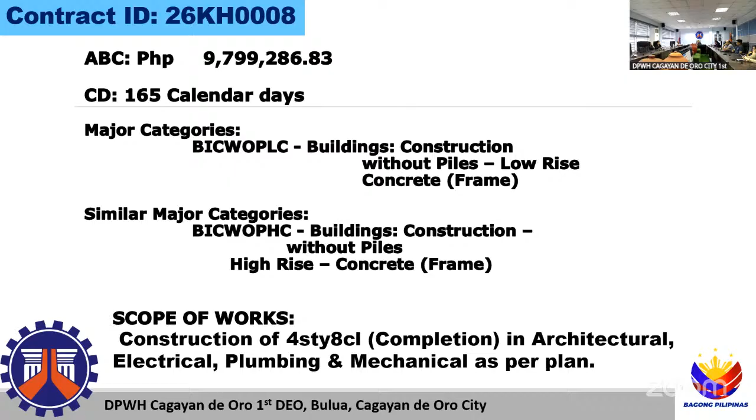So site location is this area. Site photo is one. And the perspective is one.

So the scope of works as per plan: no ceiling at fourth floor, no interior partition at the fourth floor, no doors, windows at the floor, no partition at the fourth floor, no plumbing fixtures at the fourth floor, no blackboard at the fourth floor, no interior painting at the fourth floor.

The rest will be constructed. So the architectural plan is one: ground floor, second floor, third floor, the fourth floor, and the roof deck. And this is the front elevation.

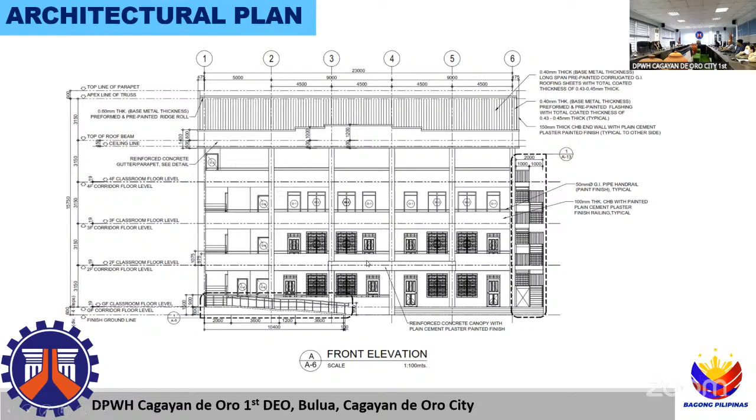So rear elevation, and right side elevation, left side, cross section,

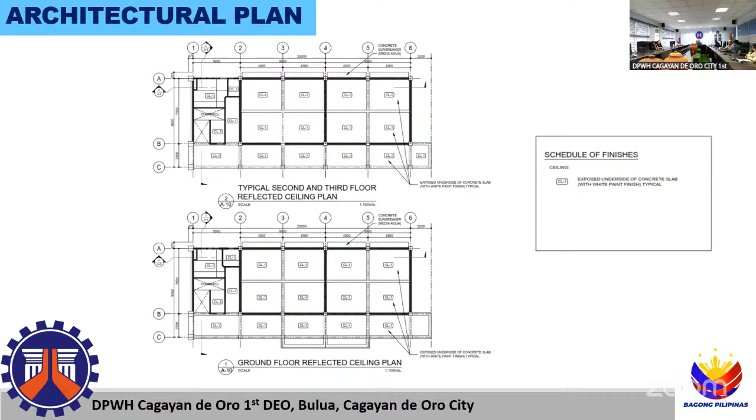schedule of architectural plan, schedule of windows, schedule of doors, and also reflected ceiling plan, so no ceiling on the floors. CL-1 exposed concrete slab with white paint finish to be had. So schedule of doors, windows, and also

the toilet details for PWD compliance as displayed. Strict compliance for the turnout to be smooth. So then the ramp details and the ramp railings and also the section of railings.

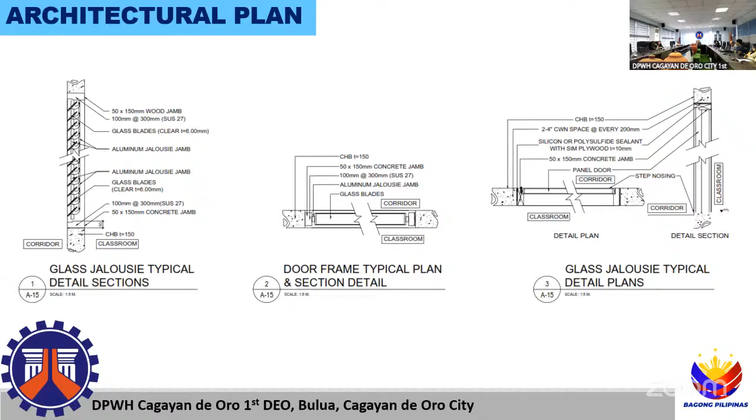Spot details of plan. And also we use glass jalousie typically for section. So ground floor and structural location of the masonry wall.

So we also have a fire exit, stairs still. Third floor, fourth floor. The roof framing plan is also included in the scope.

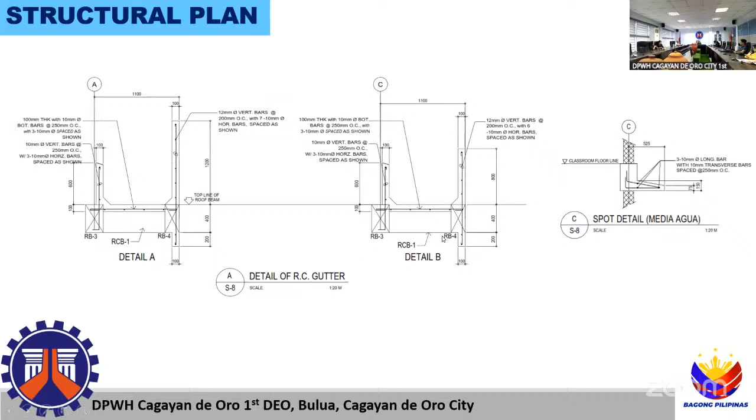And the internal concrete gutter. Connection details of truss to column, truss details, truss details. Then framing plan upstairs under deck.

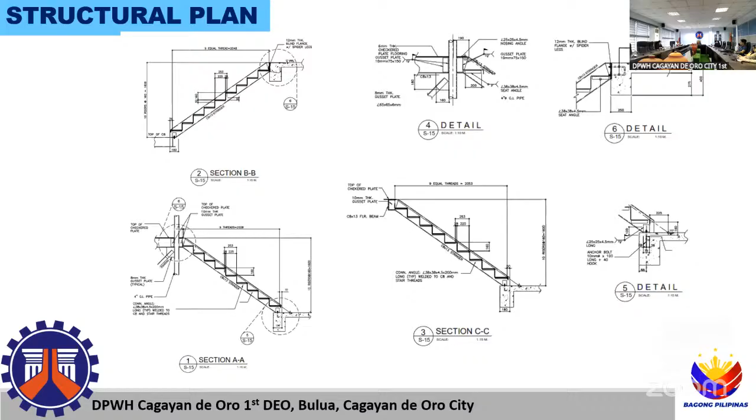And cistern tank detail, 3 meters by 2.8, and that is 2.2 meters or 2 meters.

Okay, let's go for the plan details. So we'll discuss the summary of quantities. Part B, other general requirements.

B.3-1, permits and clearances, 1 lump sum. B.5-1, project billboard / signboard, 2 each. B.7-1, occupational safety and health program, 1 lump sum. B.9-1, mobilization and demobilization, 1 lump sum.

Division I, General, Part C, earthworks. 803(1)a, structure excavation common soil, 80.832 cubic meters. 804(1)a, embankment from roadway structure common soil, 14.19 cubic meters. 804.7, gravel fill.

6.63 cubic meters. Part D, reinforced concrete: 900(1)c, structural concrete 3000 PSI class A, 28 days, 59.30 cubic meters. 900(2)c, structural concrete class B, 28 days, 2.16 cubic meters. 902(1)a1, reinforcing steel deformed grade 40, 7,799.82 kilograms, and 903(2), formworks and falseworks.

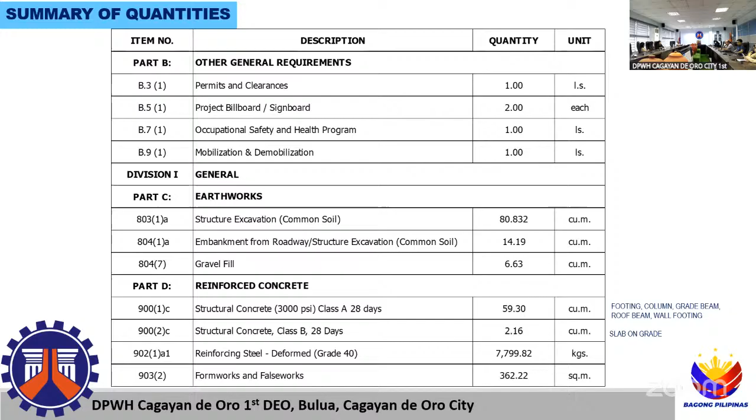117, carpentry and joinery works, 1 lump sum. 104, finish hardware, 1 lump sum. 1006, steel louver doors, 1.68 square meters. 1005, steel windows, 1 lump sum. 1091A, jalousie window glass, 71.76 square meters.

1012A, glass glazing, 15.12 square meters. 1010-2A, door flush, 18.21 square meters.

1010-2B, wooden doors, wood panel, 22.68 square meters.

1013-2A, fabricated metal roofing accessories, ridge or hip rolls, 29.28 linear meters. 1013-2B, fabricated metal roofing accessories, flashing.

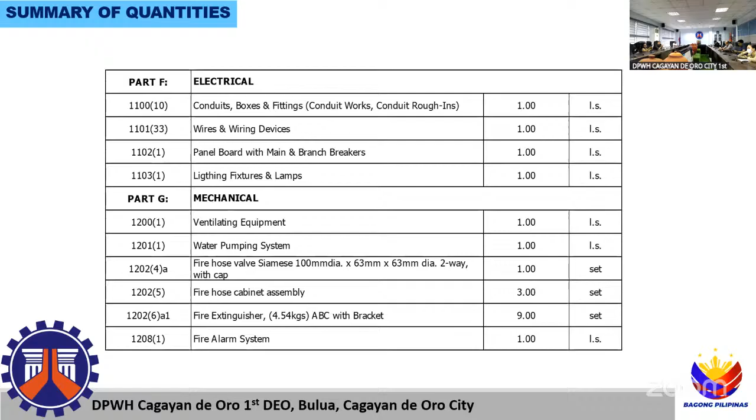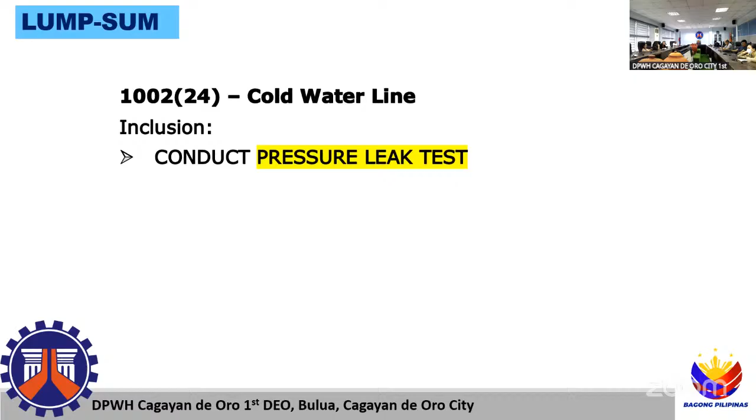Then carpentry and joinery works, inclusive of blackboard. And the lump sum of these pieces, and also wires and wiring devices.

And also the panel board details and lighting fixtures.

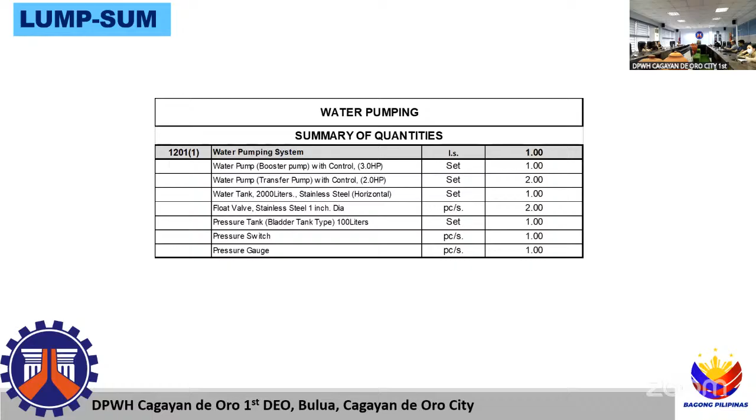And water pumping system, this one inclusive of the water pump, booster pump, transfer pump, and water tank, 2,000 liters, float valve, pressure tank, and pressure switch and such.

And description in ventilating equipment, exhaust fan, and also hose bib, fire hose valve, and also cabinet assembly, and also fire extinguisher and fire alarm system.

Grinder machine, 1 unit owned; bar cutter, 1 unit owned; bar bender, 1 unit owned; welding machine, 1 unit owned; truck mounted crane, all boom types and models, 1 unit leased; material testing apparatus, 1 set owned; hand tools, 1 set owned.

So that's all for the introduction of Iponan. Any questions?

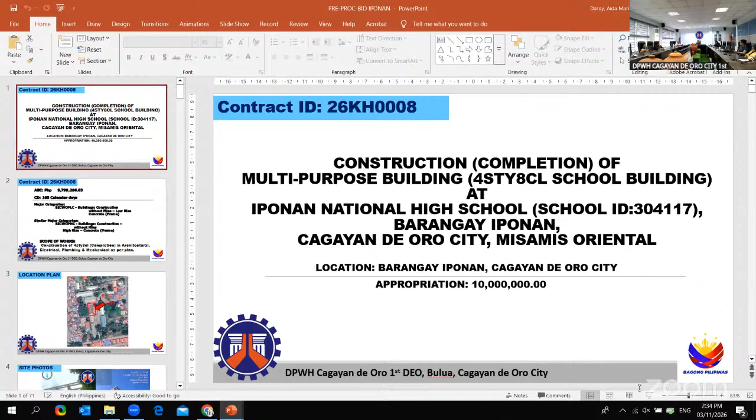So hearing none, let's proceed to our next project, 26K0026, Construction of Civil Service Commission Building, Barangay Carmen, Cagayan de Oro City, again to be presented to us by Engineer Christian Bulahan.

So the approved contract will be 4,889,645.47. Calendar days, 180 calendar days. And also major categories by CWO, PLC, and major categories by CWO, all PHC.

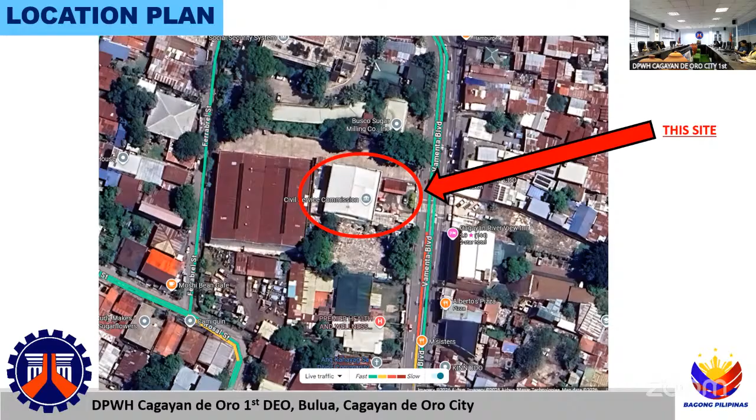So the scope of works is construction of Civil Service Commission Region 10 as per plan. Location at the side, inside the compound of the Civil Service. So the main interest here, but the access of construction will be here. So this one, because of the location of the site, will be at the back of the building. So this is the site area.

this one, a 2-story building with a storage room. So let's discuss what is inside.

So the ground floor plan will have the shredder machines. So we will prepare 1.5 meter door access for the shredder machines. So this is the position of the shredder, shredder machines.

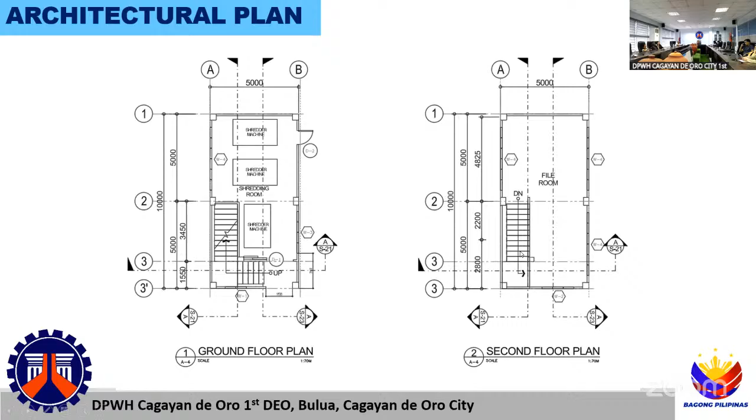Then the front elevation is what we have, CHB wall with aluminum cladding. Then

roofing, rib type. Then the elevations of the right side and the rear, and the cross section. By the way,

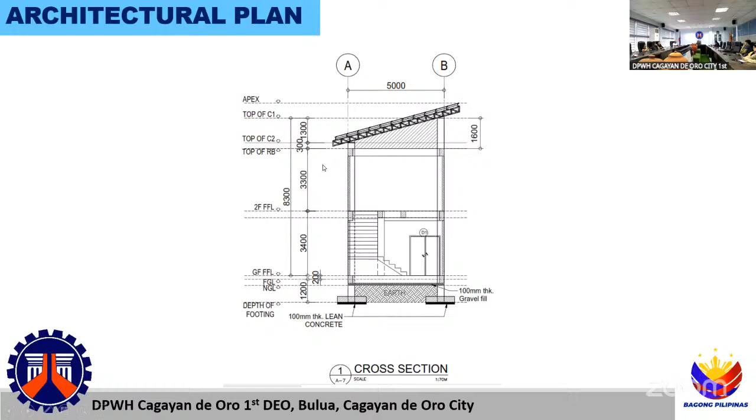this building has a high ceiling. We will prepare the height of the building from ground floor finish line to second floor finish line at 3.4 meters, and from the second floor finish line to the top of roof beam at 3.3 meters because they are used for stock room.

Also window two, sliding with sliding door as the glass windows, with all powder coated white aluminum frame. And also sliding glass windows also.

So we have sliding doors in the main entrance and swing type for ground and second floor. So roof plan.

Ground floor ceiling plan, we have acoustical ceiling board. The second floor, acoustical ceiling board. And the floor finish will be 40 by 40 centimeter glazed tiles.

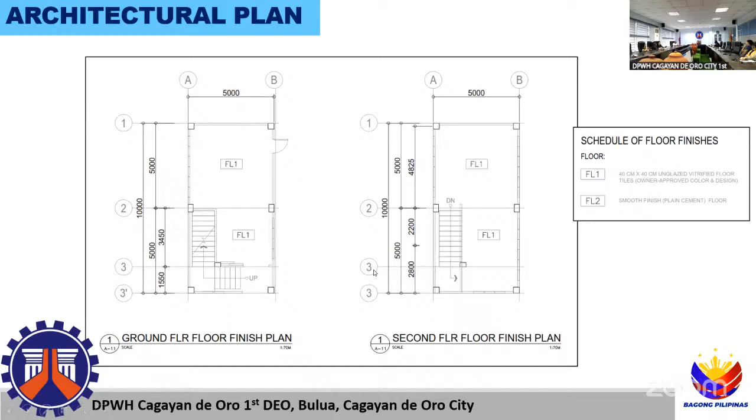Schedule of the plan and elevations of footings, details, and the wall detail of wall on footing typical to the building. Then detail of stiffener column.

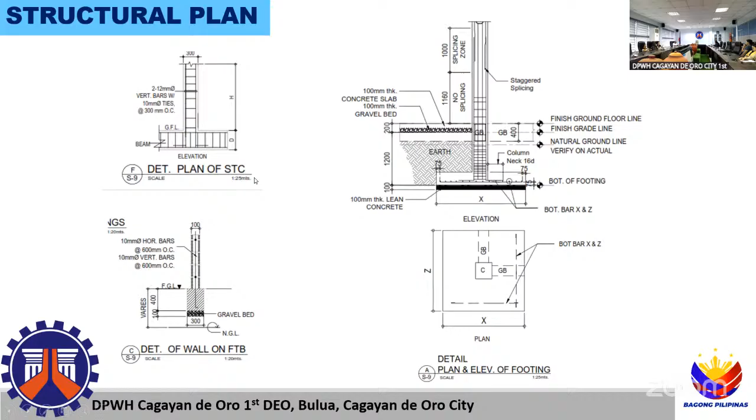Then footing, schedule of footing 1.6 by 1.6, F1, F2 is 2 meters by 2 meters, F3 is 1 meter.

And schedule of columns and elevations of columns. Typical details, so column details and elevations.

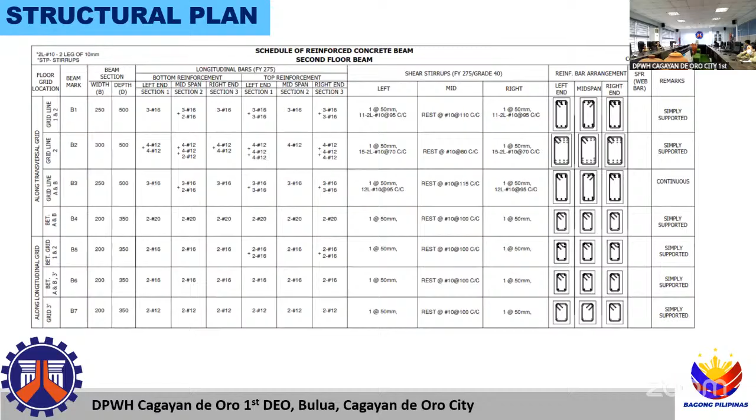Then the schedule of reinforced concrete beam or grade beam. And second floor beam schedule. And also roof beam.

And slab details, bottom bars and top bars. Schedule of slab and section of slab.

So longitudinal section 1 details, longitudinal section 2, and cross sections.

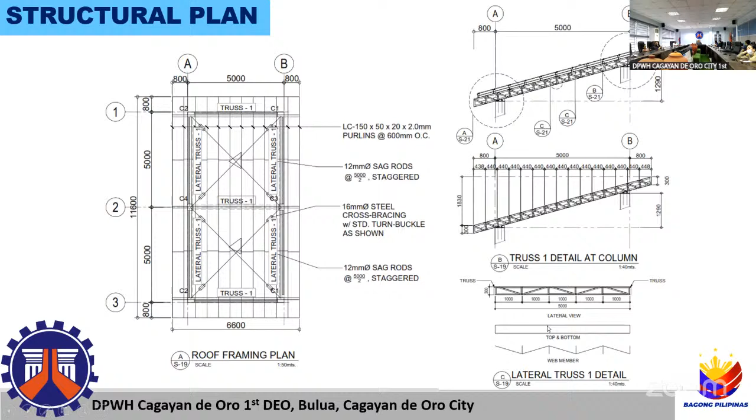So truss details is one. Then the truss detail, truss one details, we're using 50 by 50 millimeters double. Only the lateral truss one is single. This one, the isometric view, truss details.

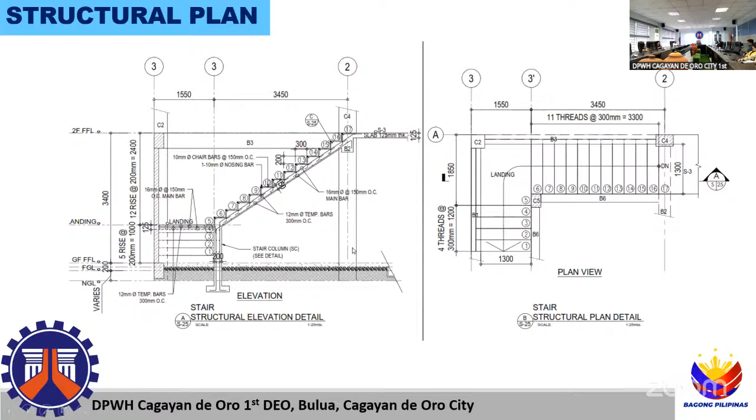So this is the typical details of the fence. So in summary of quantities: B.3.1 permits and clearances, 1 lump sum; B.5.1 billboards and signboard, 2 each; B.7 occupational safety and health, 1 lump sum; B.9.1 mobilization and demobilization, 1 lump sum; B.13 additional geotechnical investigation, 1 lump sum, because we will discuss this later in detail.

In part D, reinforced concrete: 900.1C structural concrete, 3000 PSI class A, 28 days, 26.19 cubic meters, including the footing, columns, grade beam, roof beam, and footing. 900.1I structural concrete class A, 28 days, 11.02 cubic meters - this is for the second floor or third floor roof beam and second/third floor slab. Also 900.2C structural concrete class B, 7 cubic meters, slab concrete.

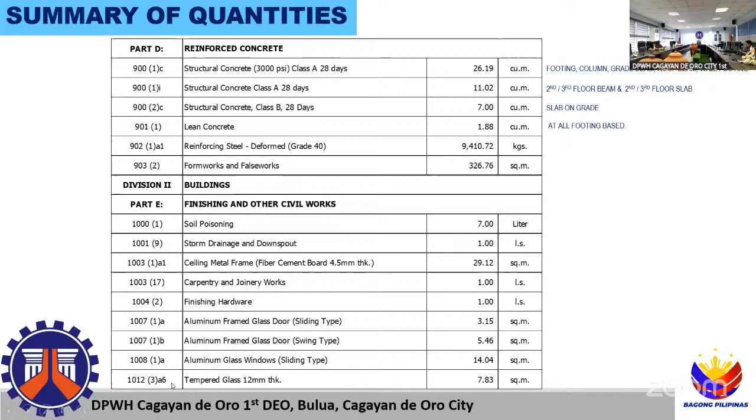1007.1A aluminum frame glass door, sliding type, 3.15 square meters; 1007.1B aluminum frame glass door, swing type, 5.46 square meters; 1008.1A aluminum glass window, sliding type, 14.04 square meters; 1012.3A6 tempered glass, 12mm thick, 7.83 square meters.

1027.1 cement plaster finish, 443.56 square meters. 1031.31 acoustical ceiling panel, 96.04 square meters.

1032.1A painting works, masonry/concrete, 337 square meters; 1032.1B painting works, wood, 29.26 square meters; 1032.1C painting works, steel, 8.32 square meters; 1038.1 painting insulation, 76.56 square meters; 1046.2A CHB non-load bearing, including the first and second floor, 232.28 square meters.

1047.4A bolts and rods, 24 each; 1047.4B turnbuckle, 16 each; 1047.5B sag rod, 12.46 kilograms; 1047.5C cross bracing, 82.06 kilograms; 1047.5D steel plates, 101.48 kilograms.

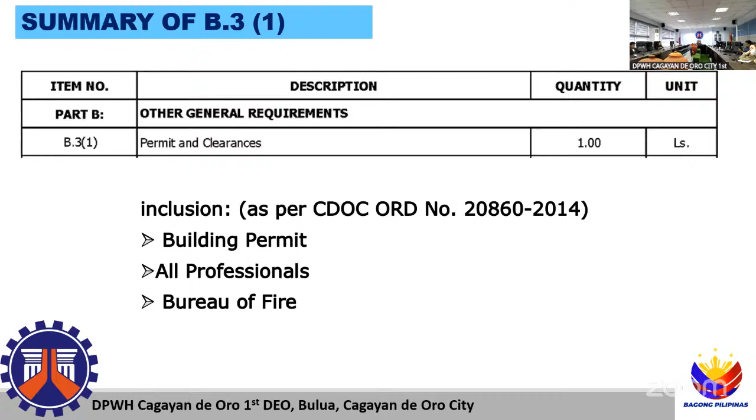So we discussed the summary quantities of the following: building permits and clearances, building permits, all professional fees, and B.7.1 the safety tarpaulin.

So in BDAT 19, additional geotechnical investigation. The inclusions are soil and laboratory testing, specific gravity balance, liquid limit device, glass plates, and drilling machine with complete series. Then geotechnical and geologist evaluation and report, 5 copies each set. Note that 2 sets of final geotechnical and geologist reports must be submitted at the office.

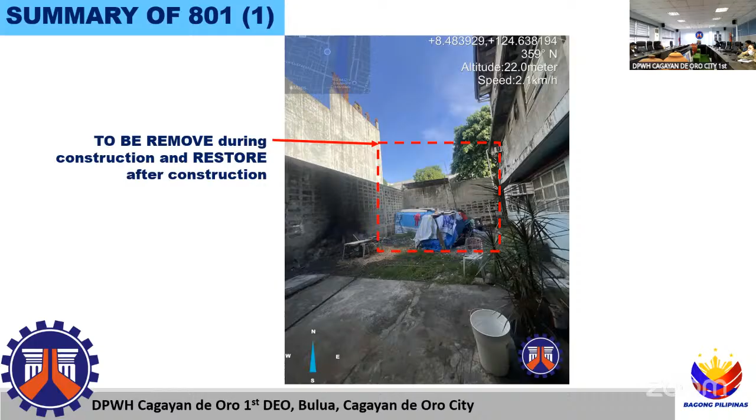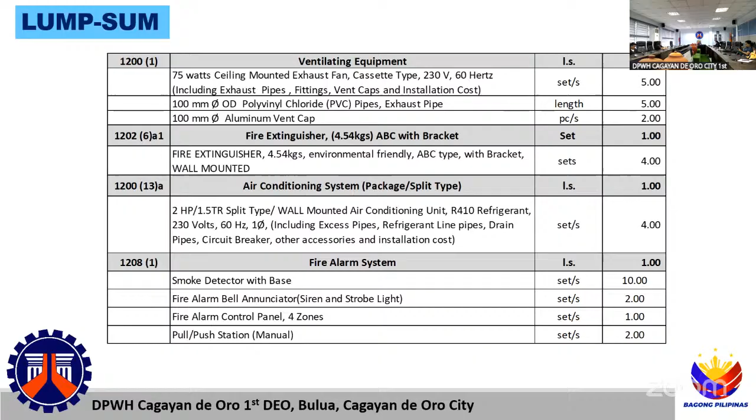So in lump sum items: conduit boxes and fittings, wires and wiring devices, the panel board, and also the lighting fixtures, ventilating equipment, fire extinguisher, aircon, and fire alarm system, and also the CCTV system.

So that's all for the civil service building.

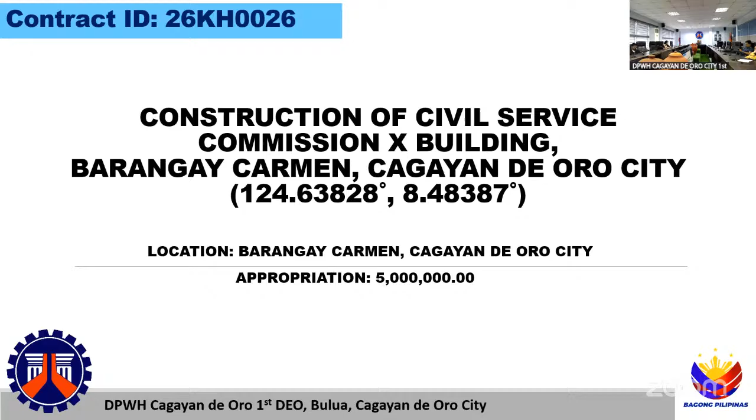26KH0027, construction of multipurpose building, 3-story 12 classroom building at Macanhan Elementary School, Barangay Carmen, Cagayan de Oro City. This is to be discussed to us by Engineer Misamis.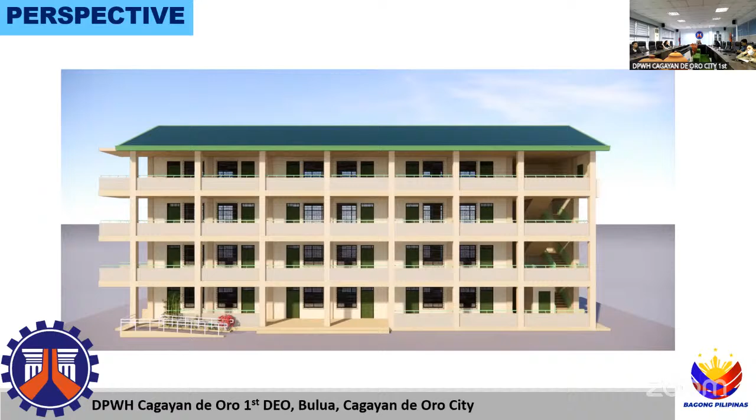This is the site development plan. So again, this project is located inside the Macanhan Elementary School.

So these are the architectural plans. For the ground floor plan, there is one room which serves as the feeding room, and classrooms 2 and 3 will be combined as one to serve as the library room for the ground floor.

Second floor, one regular room and classrooms 5 and 6 to be combined to serve as the ICT room. Third floor, one regular room and classrooms 8 and 9 to be combined to serve as the science room. Fourth floor consists of 3 regular rooms, namely classrooms 10, 11, and 12.

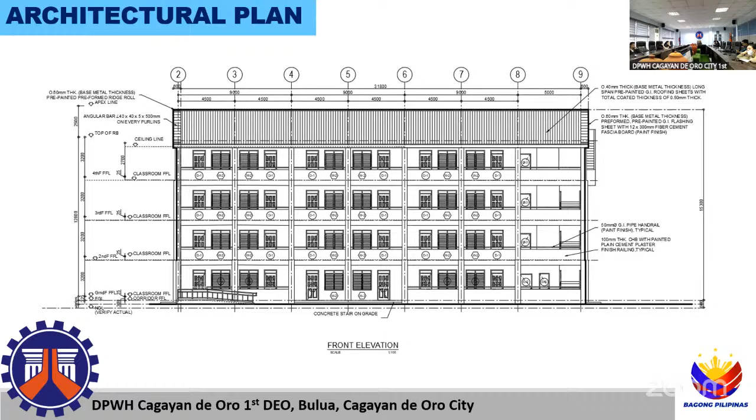So these are the elevations of the project, showing different elevations: rear elevation, left side and right side elevation. This is the longitudinal section of the project, cross-sectional section.

These are the reflected ceiling plans of the project, showing the ground floor, second and third floor reflected ceiling plan, fourth floor reflected ceiling plan, and the roof plan of the project.

So this is the schedule of doors, schedule of windows.

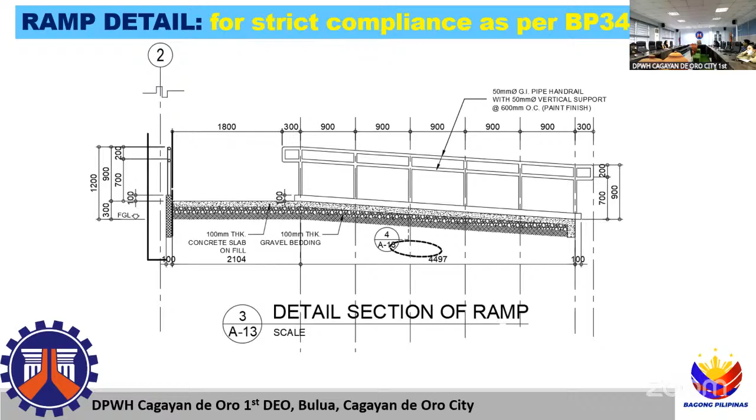This is the detail section of the ramp, which is for strict compliance as per BP 344. Detailed elevation of ramp, detailed plan again for strict compliance as per BP 344.

This is the detail section of handrails. This is the ramp detail, again for strict compliance as per BP 344. This is the detail for the PWD toilet detail, including the toilet details at PWD.

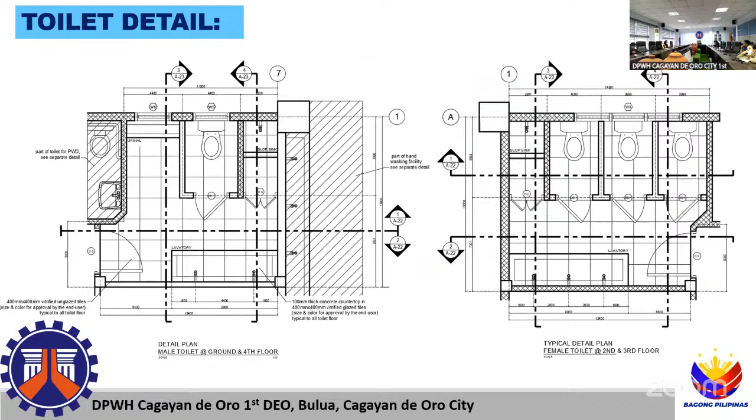Male and female toilet typical detail plan. Male and female ground and fourth floor typical detail. Male and female ground and fourth floor section detail.

For the structural plan, this shows the foundation plan of the project. Ground floor framing plan, typical second and third floor framing plan, fourth floor framing plan, and the roof framing plan at bottom chord.

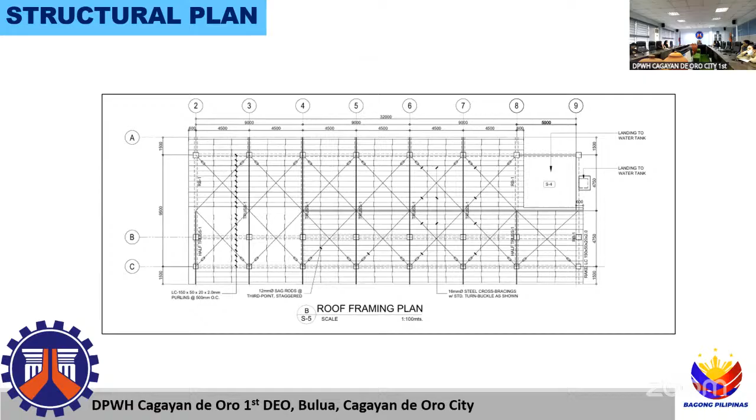Roof framing plan. These are the detailed plan and elevation of the foundation. This is the schedule of footing of tie beam.

Schedule of column, schedule of beams, and this is the schedule of secondary beams.

This is the truss elevation for truss one elevation, elevation of end wall frame and half truss. This is the schedule of trusses, members, and welds, including the concrete sun breaker detail.

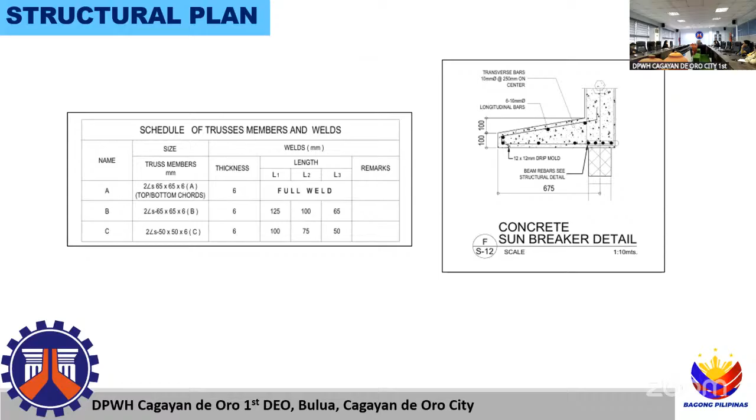Structural plan, blow up details of stairs. This is the plumbing plan of the project.

Septic tank, cistern detail, longitudinal section of cistern. This is the ground floor plan of soil and wastewater line layout for the ground floor plan.

The typical second and third floor soil and wastewater line layout. Fourth floor plan, soil and wastewater line layout. And the roof drain layout.

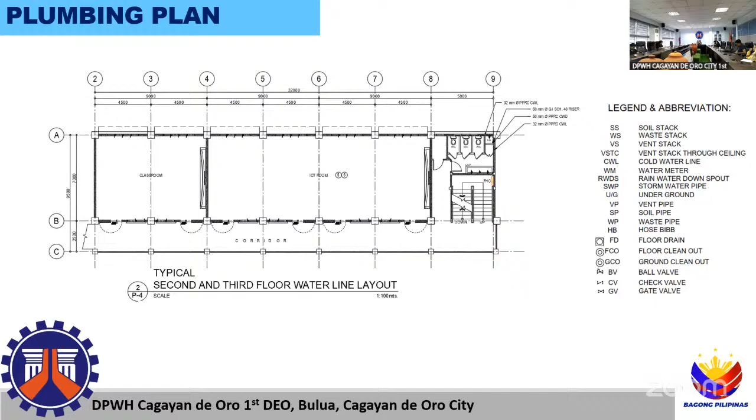Ground floor water line layout. This is the typical second and third floor water line layout. Fourth floor water line layout. Roof deck water line layout.

Summary of quantities. A113 construction of field office for the engineer, 1 lump sum. B31 permits and clearances, 1 lump sum.

B51 project billboard signboard, 2 each. B71 occupational safety and health program, 1 lump sum. B91 mobilization and demobilization, 1 lump sum. B13 additional geotechnical investigation, 1 lump sum.

801-1 removal of structures and obstruction, 1 lump sum. 803-1A structure excavation common soil, 1,311.10 cubic meter. 803B individual removal of trees, small b above 300 mm diameter up to 500 mm diameter, 1 each.

804-1A embankment from roadway structure excavation common soil, 240.199 cubic meter.

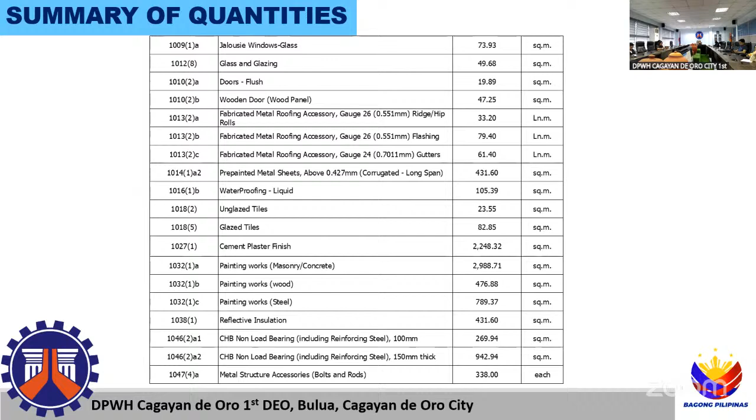1,046-2A2 CHB non-load bearing including reinforcing steel, 150 mm thick, 942.94 square meters. 1,047-4A metal structure accessories, bolts and rods, 338 each.

1,047-4B metal structure accessories, turnbuckle, 28 each. 1,047-5B metal structure accessories, sag rods.

191.81 kilograms. 1,047-5C metal structure accessories, cross bracing, 397.66 kilograms. 1,047-5D metal structure accessories, steel plates, 1,280.24 kilograms. 1,047-7 structural steel, 1 lump sum.

1,047-8A structural steel trusses, 3,864.64 kilograms. 1,047-8B structural steel purlins, 3,864 kilograms. 1,051-1A railing, 1 lump sum.

1,110 conduits, boxes and fittings, 1 lump sum. 1,101-33 wires and wiring devices, 1 lump sum. 1,102-1 panel board with main and branch breakers, 1 lump sum. 1,102-11 pole mounted transformer with complete accessories, single or three-phase, pole type or platform, 1 lump sum.

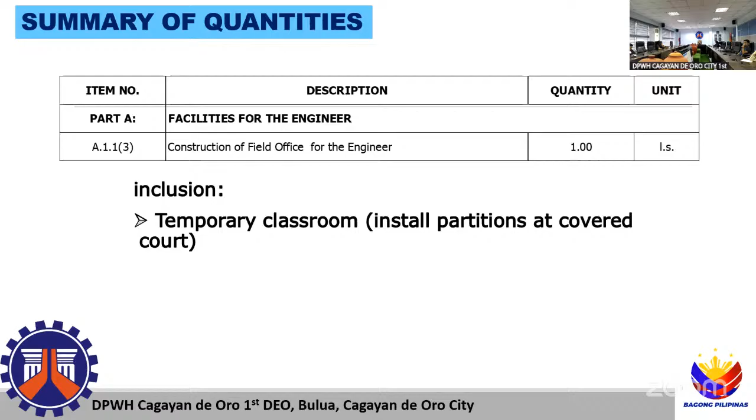Summary of quantities. Item A113, construction field office for the engineers, including temporary classroom, installed partitions at the covered court. B31 permits and clearances, including the building permit, all professional fees, and bureau of fire clearance.

This is the building to be demolished. The red box indicates the HE room, which is also to be demolished.

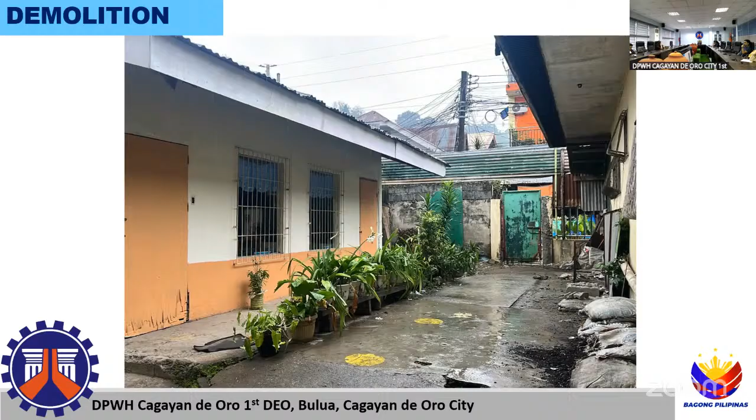So these are photos for the demolition.

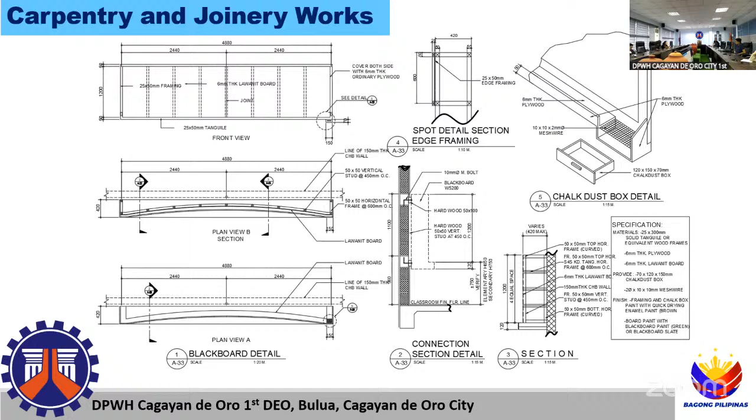Conduits, boxes, and fittings, other item 1110. Flexible metal conduit, 15. Rigid steel conduit, 15. Rigid steel conduit, 2 inch, 3. Rigid steel conduit, RSC, 3/4 inch, 20mm diameter, 6 meters, 15 pieces. Rigid steel conduit, RSC, 2 inch, 50mm diameter, 6 meters, 3 pieces.

Polyvinyl chloride pipes, PVC, UPVC, 3/4 inch, 20mm diameter, 101 pieces. Polyvinyl chloride pipes, PVC, UPVC, 1 and 1/2 inch, 40mm diameter, 15 pieces. Polyvinyl chloride pipes, PVC, UPVC, 1 inch, 25mm diameter, 20 pieces.

Rigid steel conduit coupling, 3/4 inch, 20mm diameter, 15 pieces. Rigid steel conduit coupling, 2 inch, 50mm diameter, 5 pieces. Rigid steel conduit lock nut and bushing, 3/4 inch, 20mm diameter, 15 pieces. Rigid steel conduit lock nut and bushing, 2 inch, 50mm diameter, 3 pieces.

PVC male adapter with lock nut, 3/4 inch, 20mm diameter, 101 pieces. PVC male adapter with lock nut, 1 and 1/2 inch, 40mm diameter, 15 pieces. Rigid steel conduit elbow, 90 degrees, 3/4 inch, 20mm diameter, 8 pieces. Rigid steel conduit elbow, 90 degrees, 2 inch, 50mm diameter, 3 pieces.

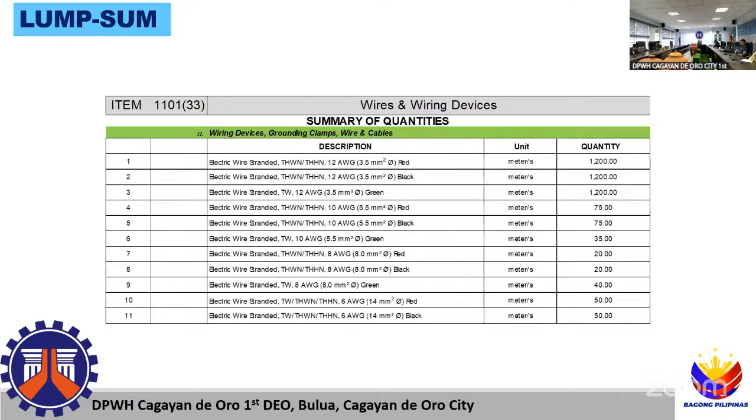These are the inclusions under item 1101-33, under wiring devices, grounding clamps, wire and cables. These are for item 1102-1, panel board with main and branch breakers.

This is for the pole mounted transformer with complete accessories, single or three-phase pole type or platform, under item 110211. This is for the lighting fixture under item 1131 and the CCTV system under item 1161.

This is for the ventilating equipment under item 1201. Air conditioning system under item 1213A and the water pumping system under item 1201.

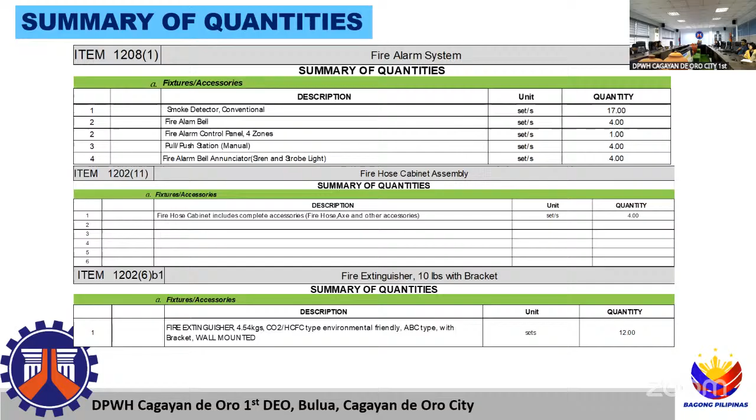These are the quantities under fire alarm system, item 1208-1, and for the fire hose cabinet assembly under item 120211, and fire extinguisher 10 pounds with bracket under item 1202-6B1. These are the minimum equipment requirements.

One unit owned, bagger mixer, 1 unit owned, plate compactor, 1 unit owned, grinding machine, 1 unit owned, bar cutter, 1 unit owned, bar bender, 1 unit owned, 3-phase, 1 unit owned, welding machine electric, 1 unit owned, truck mounted crane standard lattice boom all models, 1 unit leased.

Material testing apparatus, 1 unit owned. Minor tools, 1 unit owned.

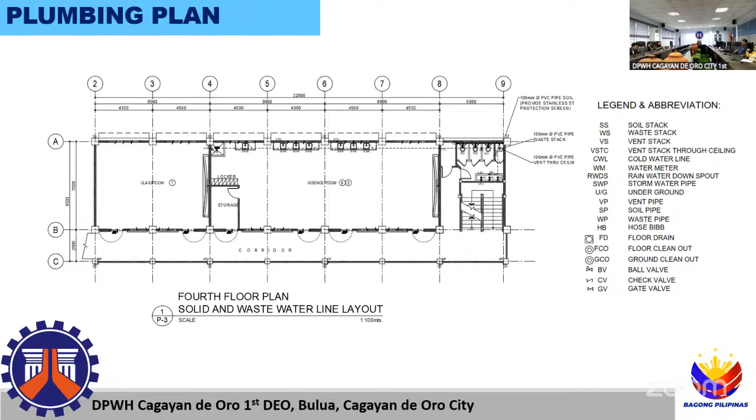So in the title, you have construction of multi-purpose building, 3-story tall classroom school building, right? Okay, yes. While you were conducting your presentation with Engineer Macray and the principal of Macanhan, you came up with a 4-story digital classroom building. So you have to clarify the title so that there will be no discrepancy.

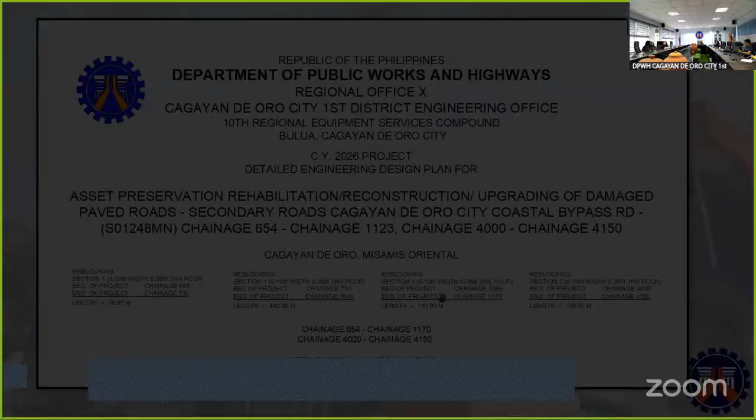Good afternoon, everyone. I will present 26K0030, the asset preservation, rehabilitation, reconstruction, upgrading of damaged paved roads, secondary roads, Cagayan de Oro City Coastal Bypass Road. The road ID is 01248 MN, chainage 654 to chainage 1123.

And chainage 4000 to chainage 4150. So our budget is more on reblocking. Section 1, we have an 8-meter width, 0.28 thickness PCCP with a length of 56 meters around chainage 654 to chainage 710. Also at section 1, we have a 3-lane, 9.15 width, 0.28 thickness PCCP reblocking from chainage 710 to chainage 1040. And reblocking also on section 1 with 2 lanes with a width of 6.1 meter with 0.28 thick PCCP from chainage 1060 to 1170.

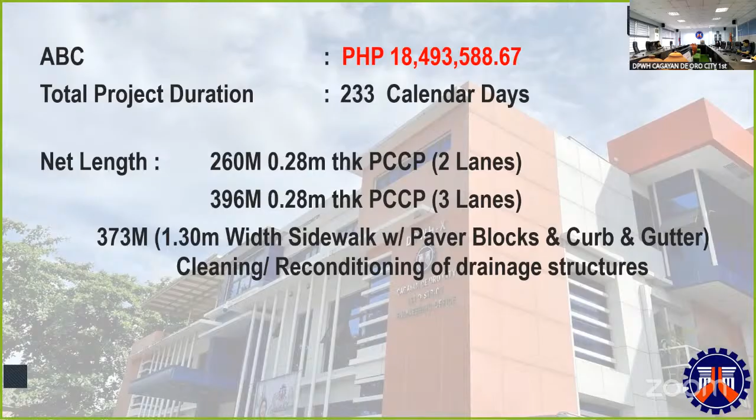The location of our project: you'll find it around Barangay Kauswagan near the Jollibee house. The first section starts our project here. For section 1, chainage 654 with 2 lanes, also 2 lanes here. Around chainage 710, we have 3 lanes. We'll set a proper traffic management for this area with a 50 meter workable area per section.

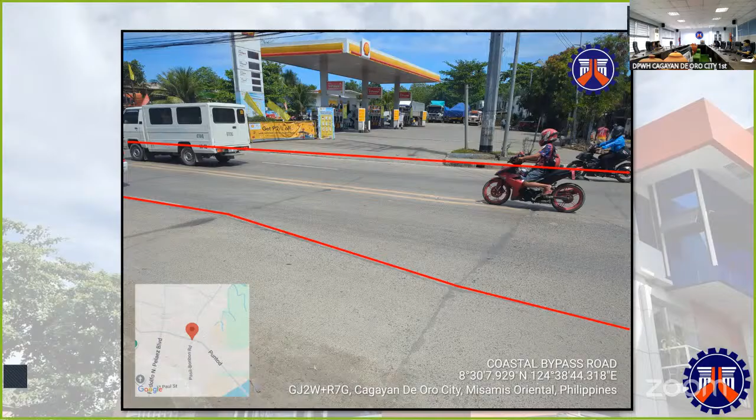Our PCCP will have a 3 day curing period for this project. Continuing, we have to remove and replace this existing sidewalk and develop it. As you can see, we have a very damaged PCCP. The existing PCCP is 0.23 meter thickness, so we will remove and replace it, around here, 2 lanes near the Jollibee area.

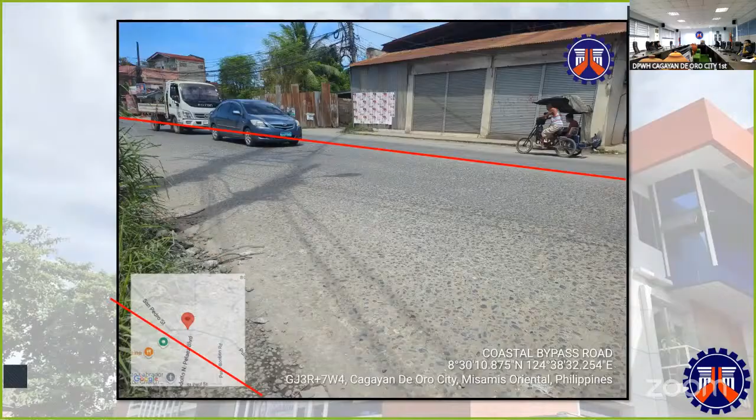For the end of our project, section 1, here in chainage 1170. For section 2, the start of section 2 at chainage 4000, we will develop and reblock the inner lanes until chainage 4150, so around 150 meters.

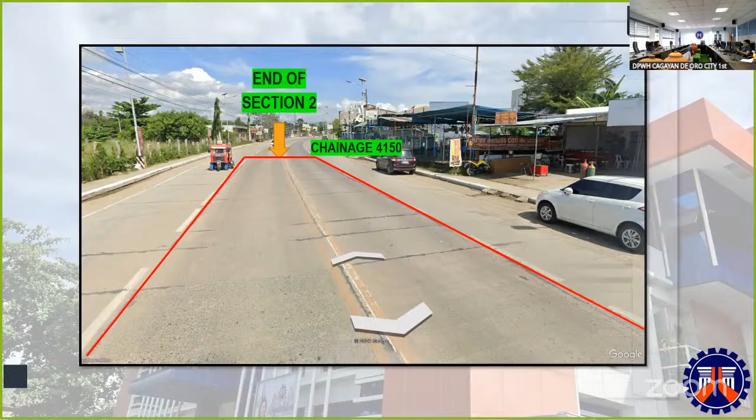This is the summary for traffic management. We have 31 stages for our project with 50-meter staging areas to not fully impede the traffic situation of the area. For the plan, the gray areas are the remove and replace or reblocking, and the sides colored red are the sidewalk.

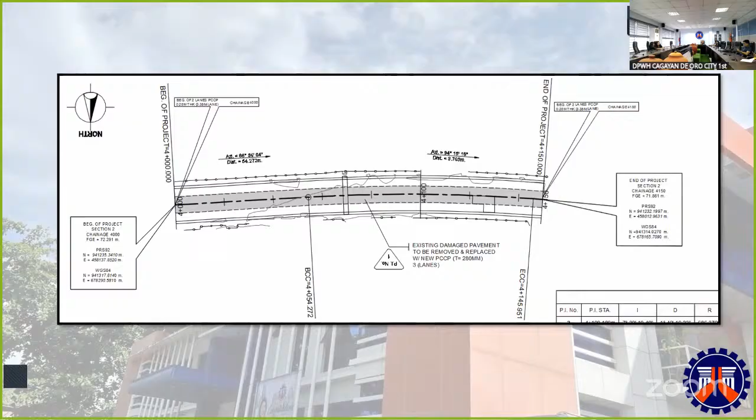Also in section 2, the inner lanes. For the typical details, we have a typical roadway section. For section 1, reblocking with 2 lanes.

As indicated here, we have removal of existing structure obstruction, 0.23 thick PCCP unreinforced, and also 0.20 thick aggregate base course. We'll replace the existing PCCP with Portland cement concrete pavement unreinforced, 0.28 meter thickness, 3 days. Also on the left side, we can see the concrete paving blocks, and also we will remove the existing curb

and gutter with a sidewalk width of 1.3 meters. Also in roadway section 1, reblocking 3 lanes with the station limits of Chainage 710 to Chainage 1040. So below as indicated, same items.

The typical roadway section, reblocking two lanes around Chainage 1060 to Chainage 1170. There's an existing box culvert, so the left side will remove and replace. It is a very old CCP. And in section 2,

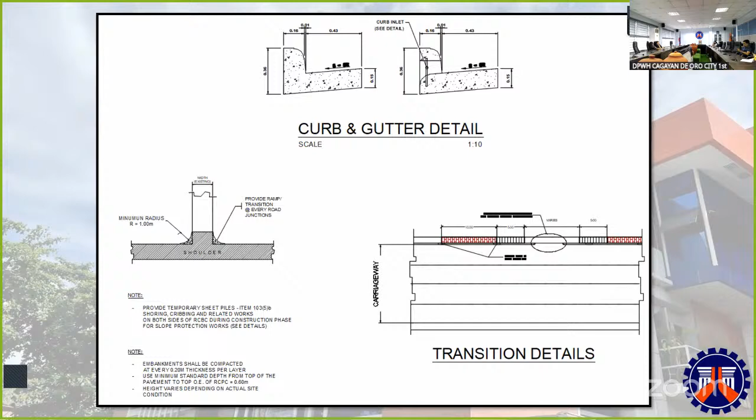we will remove and replace the inner lanes in Chainage 4000 to Chainage 4150. For the typical reblocking dowel pavement details, with details for curb and gutter and transitions around intersections, the complete curb and gutter detail, the inlet detail, and also the isometric view of the sidewalk. For the sidewalk detail, also we have a paver block stopper.

And general notes for the drop curbs. Also for the thermoplastic for our lanes.

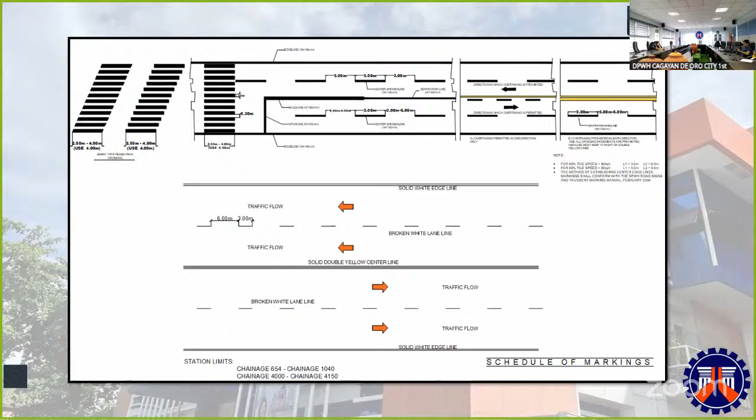For summary quantities, we have B.5 project billboard signboard for each. B.7.2 occupational safety and health program, 1 lump sum. B.8.2 traffic management, 1 lump sum. B.9 mobilization demobilization, 1 lump sum.

For part C of earthworks, we have 101 B3 removal of existing structures/obstruction 0.23 meter thick PCCP unreinforced of 5,143.5 square meters. 101 3D removal of existing structure obstruction 0.10 thick sidewalk, 970 square meters. 101 4C removal of existing structures obstruction curb and gutter, 373 meters. And 102 surplus common excavation of the quantity of 1,186.24 cubic meters.

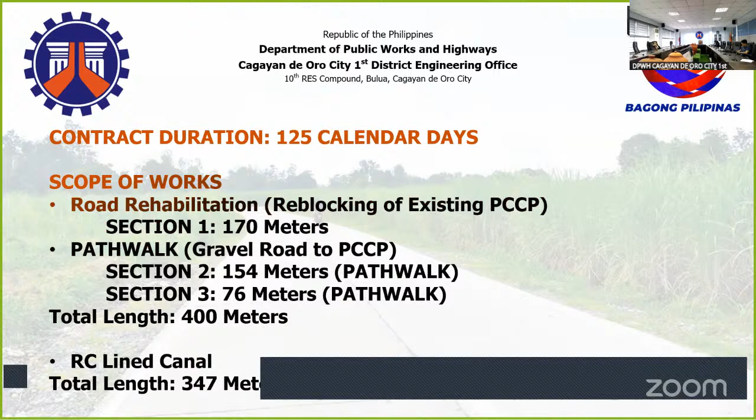So for the project design and profile details, the project includes removal of existing structures and Portland cement concrete pavement of 0.23 meters thickness. The project also includes our RC lined canal.

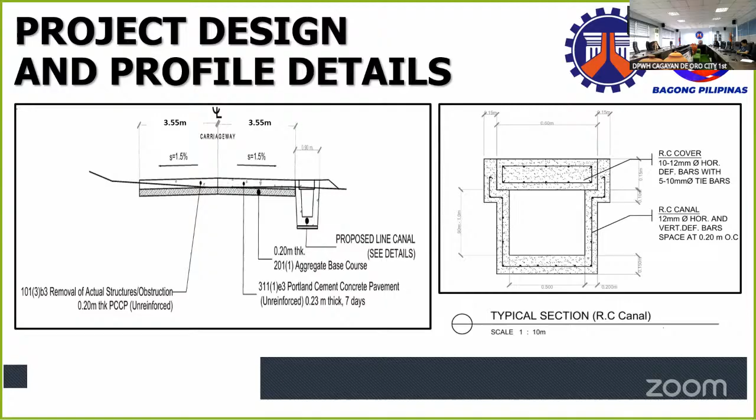For the summary of quantities: B.3 permits and clearances; B.5 project billboard/signboard, for each; B.7.2 occupational safety and health program, 1 lump sum; B.8.2 traffic management, 1 lump sum; B.9 mobilization and demobilization, 1 lump sum.

For earthwork, removal of actual structures and obstruction, 1,190 square meters. For surplus common excavation, 842.85 cubic meters. For structure excavation, 320.05 cubic meters. For subbase and base course, aggregate base course, 312.10 cubic meters. For Portland cement concrete pavement unreinforced, 0.23 meters, 1,942 square meters.

For gravel fill, 31.31 cubic meters.

For reinforced concrete items, structural concrete 4,000 PSI Class A 28 days, 163.50 cubic meters. And reinforcing steel deformed grade 40, 33,904.99 kilograms.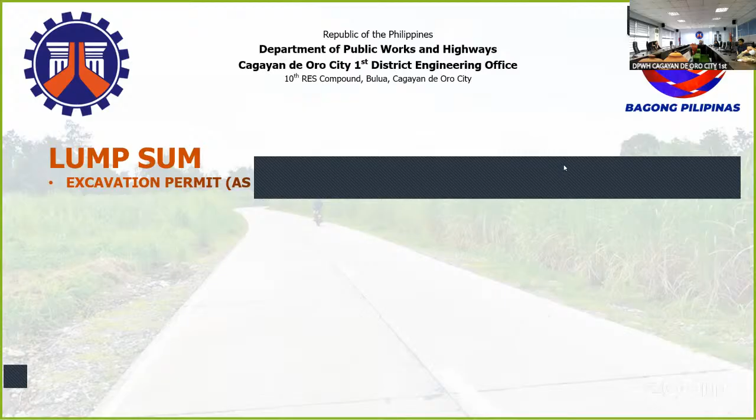For specifications, lump sum excavation permit as per Ordinance Number 12860 of 2014. Road right of way and coordination. The following files are to be followed and coordinated as well. That is all, thank you.

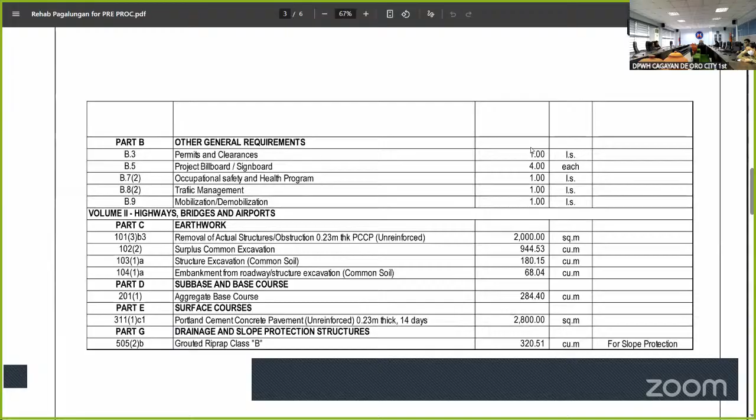And summary of quantities: B.3 permits and clearances for the excavation permits, 1 lump sum; B.5 project billboard/signboard, 4 each; B.72 occupational safety and health program, 1 lump sum; B.82 traffic management, 1 lump sum; B.9 mobilization/demobilization, 1 lump sum.

And for our earthworks: 1013B3 removal of actual structures/obstruction, 0.23 meters thick PCCP unreinforced, with a quantity of 2,000 square meters; 1022 surplus common excavation, quantity of 944.53 cubic meters; 1031A structure excavation common soil, quantity of 180.15 cubic meters; and 104.1A embankment from roadway/structure excavation, common soil, with a quantity of 68.04 cubic meters.

And for sub-base and base course, 201(1) aggregate base course with a quantity of 284.4 cubic meters. For our surface courses, 311 1C1 Portland cement concrete pavement unreinforced, 0.23 meters thick, 14 days, with a quantity of 2,800 square meters. And for our drainage and slope protection structures, 505(2)b grouted riprap Class B with a quantity of 320.51 cubic meters.

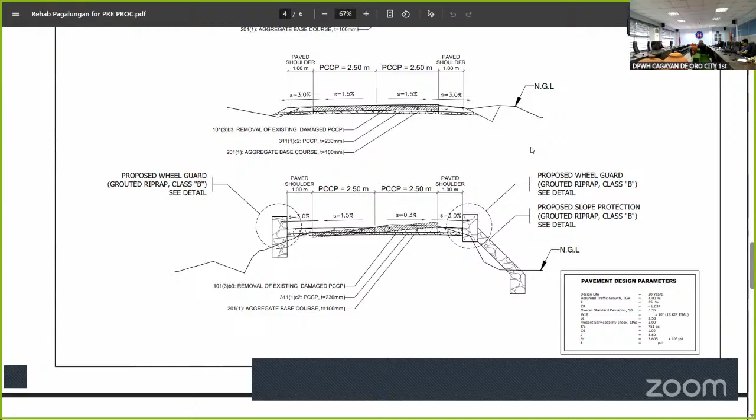And here are the typical roadway sections for rehabilitation of Pagalungan. The proposed 2.5 per lane and a paved shoulder of 1 meter. As shown here is the grouted riprap or the slope protection proposed for the project. And here are the typicals for the slope protection grouted riprap details and the wheel guard details, and for our typical connecting for the rehab road project.

For our minimum equipment required for the rehab of Pagalungan: two-way radio, 2 years lifespan, 3 owned; barricade flasher light, 10 owned; trailer for equipment, 1 lease; trailer for minor tools, 1 lease; backhoe with pavement breaker, 1 lease; payloader, 1 lease; dump truck, 2 lease; concrete saw, 1 owned; bulldozer, 1 lease; backhoe, 1 lease; motorized road grader, 1 lease; vibratory roller, 1 lease; water truck/pump, 1 lease; concrete vibrator, 2 owned; concrete screeder wacker truss screed, 1 owned; bar cutter single phase, 1 owned; mechanized joint sealer, 1 owned; material testing apparatus, 1 set owned; one-bagger mixer, 1 owned; and backhoe wheel mounted, 1 lease.

That's all for rehabilitation of Pagalungan Road, Station 0 to Station 400.

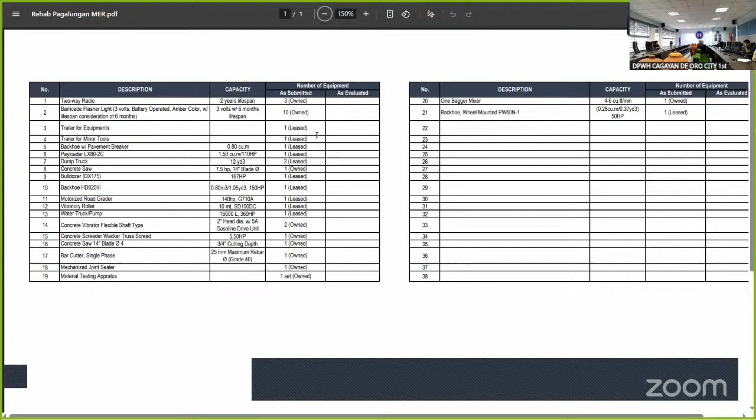Mitchell from the Procurement Engineer will discuss the mechanics and documentary requirements for bidding for this particular budget.

Bid proposals may be submitted through an authorized representative together with the original notarized special power of attorney, for sole proprietorship, or board partnership, joint venture resolution with secretary's certificate for corporation, partnership, joint venture, corporate cooperative, which is contract specific, and presentation of a company ID or any government-issued ID, to ensure the representative is an official member and to prevent fraudulent actions such as unauthorized use of another contractor's eligibility for personal gain.

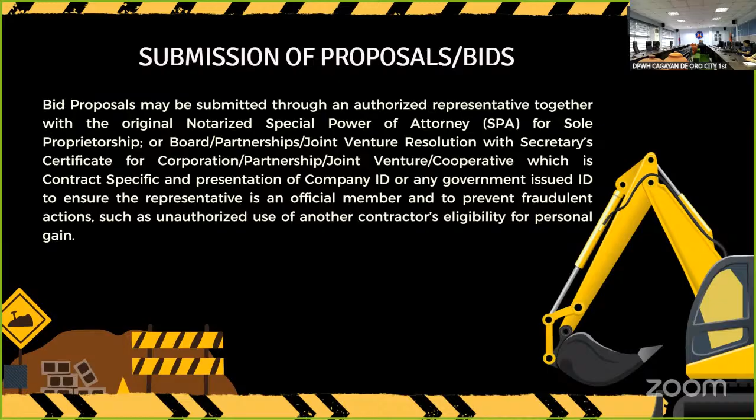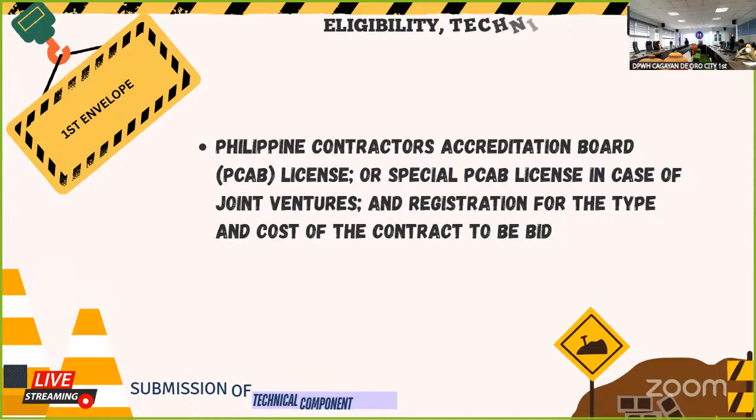The PCAB license or special PCAB for joint venture.

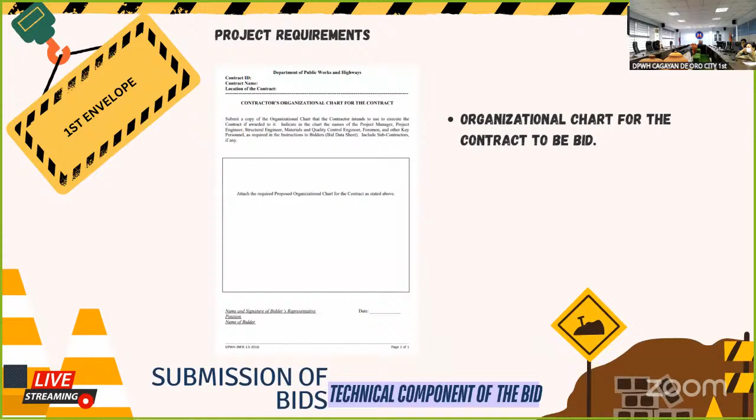Next, the bidder must provide an organizational chart for the contract, the list of contractor's key personnel, and the list of contractor's major equipment units. You see in the attached bidding documents the required years of experience for the key personnel and the number of units and capacity for the major equipment.

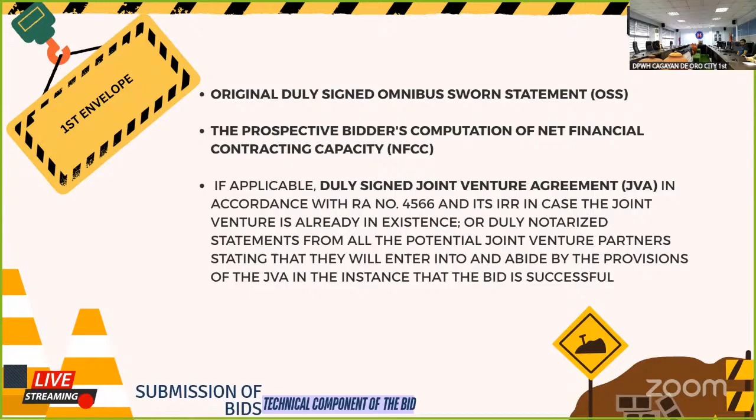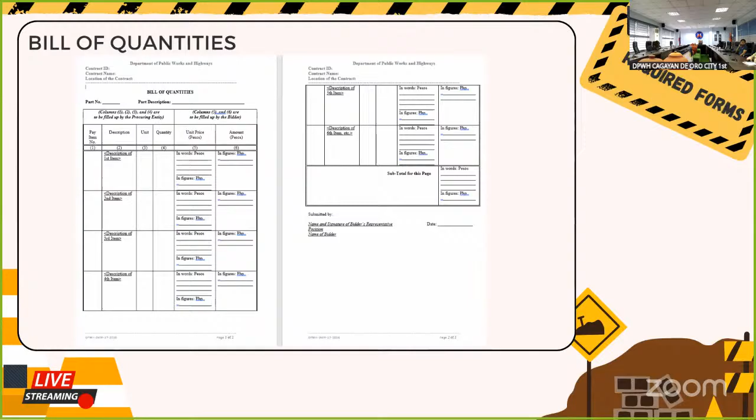Next, for the second envelope, the bidder must provide the original and duly signed financial bid form, the bill of quantities, the detailed estimates, and the cash flow by quarter. So here we have the standard form for the bid form, and the bill of quantities, the detailed estimates, and the cash flow by quarter.